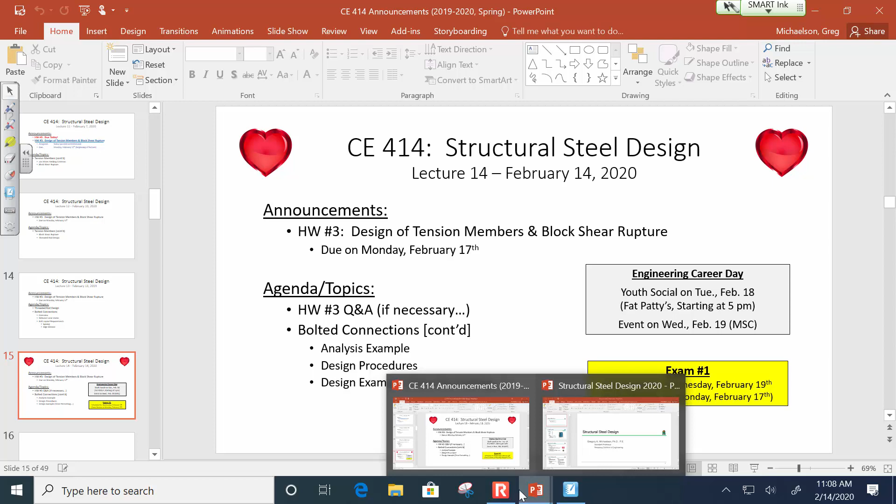Okay, so we're going to talk about bolted connections, keep trucking along. We're doing pretty good on schedule - might be a tad behind, but I trimmed some fat out of the later part of the course, so we've got a little wiggle room.

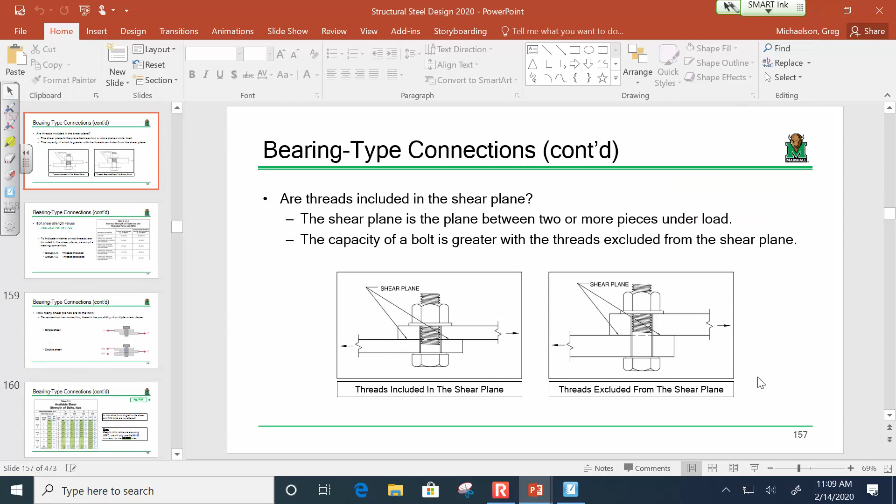We started talking about bolted connections last time. There are two types of connections we'll assess in this course: bolted connections and welded connections. I'd argue bolted connections are the second easiest topic we cover, with welded connections being the easiest.

Now let me qualify that - there's a lot of information and behavior you need to understand, but the math is really simple. Basically, you're going to have a connection with 100 kips on it. Each bolt can hold up 10 kips. How many bolts do you need? 100 divided by 10, right?

That's it, I'm being serious. It really is about that simple. There are some spacing limits and whatnot that you need, and we'll talk a lot about that stuff today. But basically, that's it.

Now, in order to design or analyze a bolted connection, if you're looking at a bearing type connection, there are 2 limit states: the failure of the bolt and the failure of the plate. Let's recap the failure of the bolt, the bolt shear capacity, the load required to shear the bolt in half.

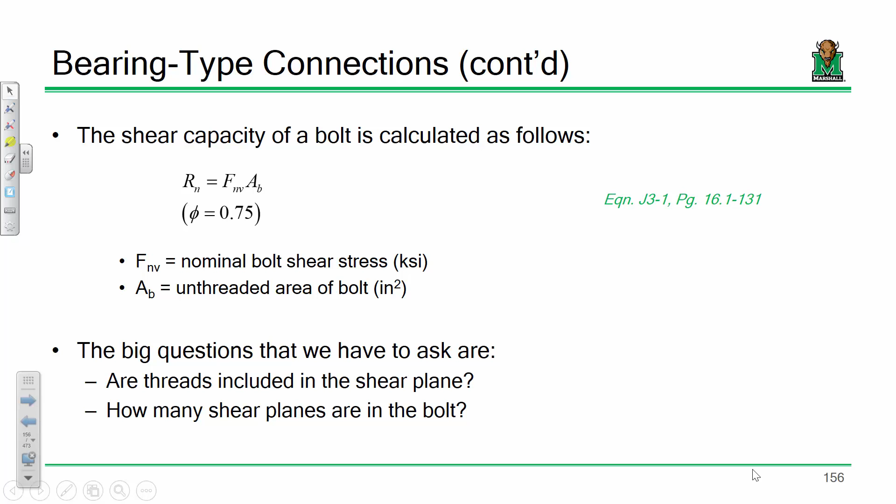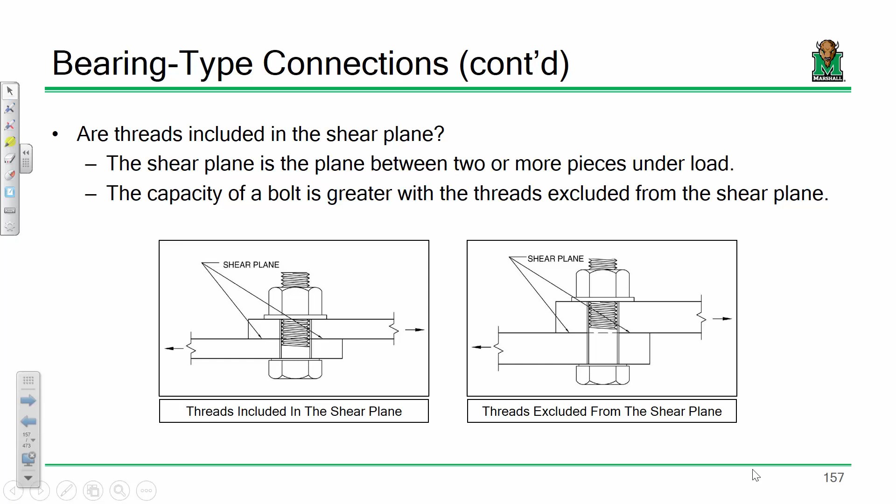So the capacity is the nominal shear capacity, Fnv, times the area of the bolt, pi d squared over 4. When you're looking at Fnv, your nominal shear capacity is a function of whether or not threads are included in the shear plane. If threads are included, the bolt's going to be weaker, okay?

So when you look up Fnv values in table J3.2, it says group A bolts where threads are not excluded from the shear planes, and group A bolts where they are excluded. In this course, we'll refer to that as group A-N, threads being included... I mean, group A-N, threads being included, group A-X threads being excluded. Remember, group A isn't a real bolt type — it's just us taking different bolts with the same behavior and calling them group A. There are A325 bolts, and so on.

Now, the other thing you have to ask is the bolt area. The area of the bolt is pi d squared over 4, but that assumes a single shear plane — a bolt tying 2 plates together. But if you have something like a splice where a bolt goes through 3 plates, there are 2 shear planes, so you multiply the area by 2. The bolt isn't magically twice as strong, but you have to shear through twice as much area to separate the bolt from itself.

Now, everything I'm talking about is pretty much moot because you don't have to compute the capacity of a single bolt at all. All you have to do is look at the table — it does all the math for you. We can walk through this together. Let's do one super quick, just so you see where these numbers are coming from. Watch this.

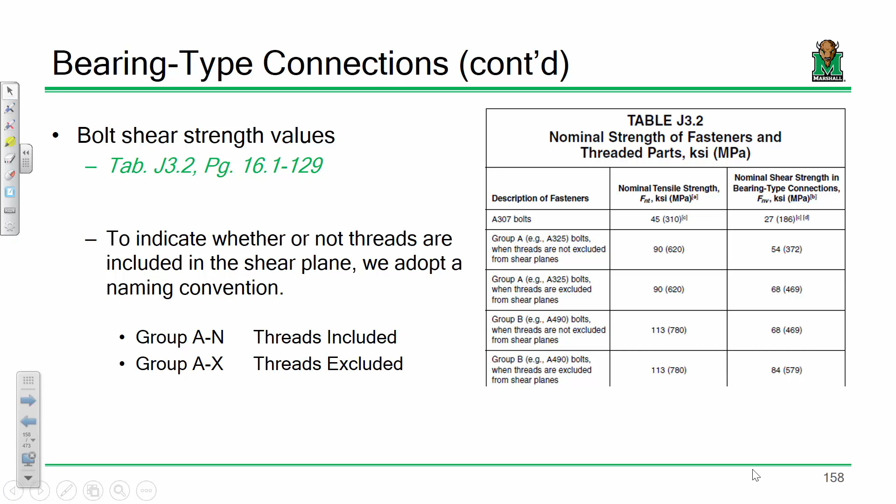So, 17.9, something like that. That's 17.9 kips — I'll say kip per bolt.

Whereas if you go to this table in the spec, what do we have? Let's follow this through: 3/4 inch diameter bolt, group A, threads included, single shear — right on the money. This table just does all that for you. So you don't need to do this calculation, but I wanted you to see where these values come from. It's really not that complicated.

So if I have a connection that uses these types of bolts, and there are 8 bolts, what's the capacity in bolt shear? That capacity times 8. Pretty simple, right?

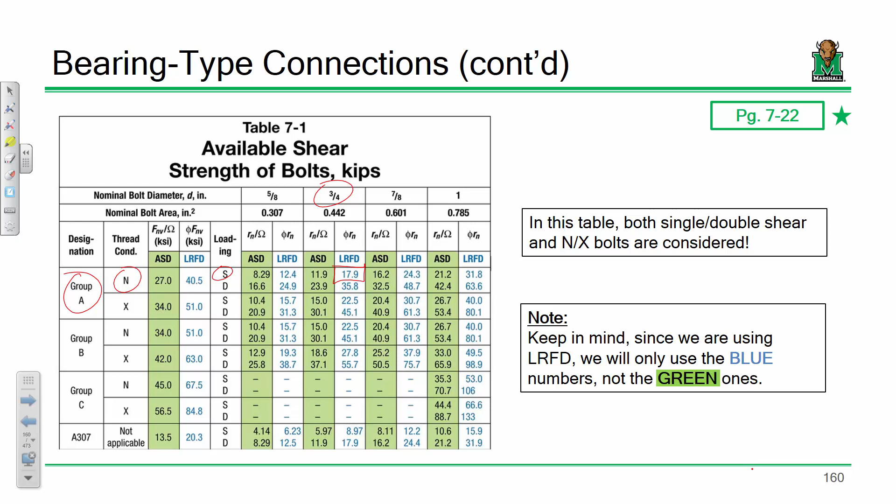All right, let's talk about bolt bearing. So what I've got is a plate, I've got a bolt hole, and I'm yanking on it. Drawing this in an exaggerated fashion, my bolt is actually in contact with the plate right here. So it's one of those things where you're applying the load and asking, what's going to give? Either the bolt's going to snap, or the plate's going to fail.

So let's talk about failure of the plate. We call this a bearing failure, because the bolt is literally bearing on the plate. Hence why we call this a bearing type connection.

Now, there's two ways that the plate can fail. The first is what's called tear out, which is kind of similar to a fracture or a block shear type failure. You're literally shearing that out, and it actually looks like you're ripping a chunk out of the plate.

Whereas ovalization is sort of like you're stretching the hole out. This is where the bolt comes into contact with the plate and sort of mashes it up like Play-Doh, which is the steel yielding in a localized fashion right there at that connection.

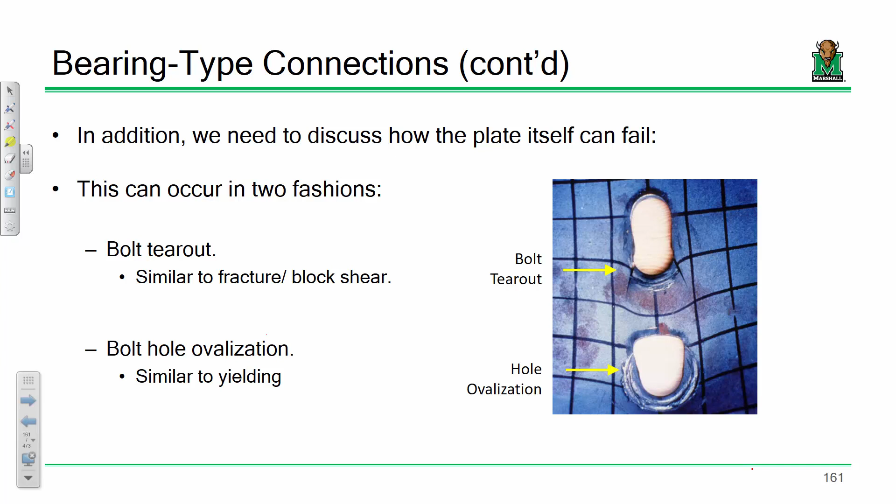Now, the way that you compute the capacity is using this equation. Before I start explaining this, let's recall a couple things. When you have an equation that's a pile of junk less than or equal to a pile of junk, what does that mean? Minimum, taking the minimum of the two. Exactly right.

So what this equation is doing: this is the tear out component and this is the ovalization component. Basically, here's the load required to tear that plate out, and here's the load required to ovalize the bolt hole. The capacity of that plate right there is just the minimum of those two.

And if you're wondering, Dr. Mike, how do you know which is tear out and which is ovalization, you're going to see very quickly. Now, I got a box that says for this computation we're considering deformation at the service load. Dr. Mike, what are you talking about? Well, maybe that involves us turning to section J3.10 on page 16.1-135, and let's actually see what I'm talking about.

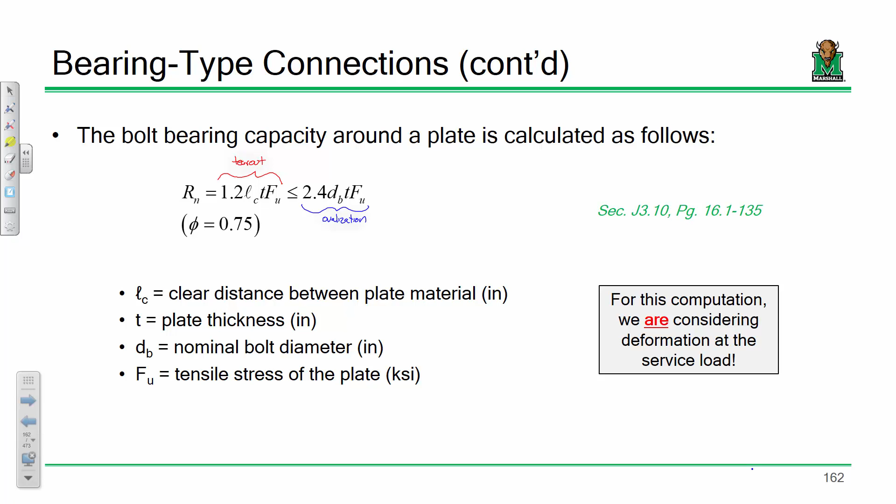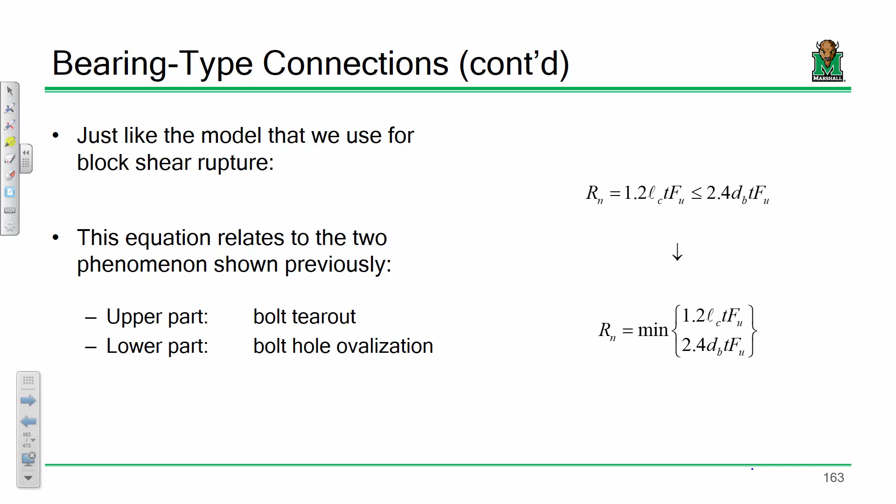L sub C is defined as the clear distance between plate material. Now, the spec gives you a bit of a longer word salad definition, and I'm going to explain that. Just like before, we can take that and split it up into the minimum of these quantities. I'm going to take this equation and make it a little easier here in a second, but basically the upper part relates to bolt tear out, the lower part relates to bolt hole ovalization or bolt bearing, and here's why.

Now let's talk about LC - LC is the clear distance between the edge of the hole and the edge of the plate, or the edge of the adjacent hole. So I'm going to look at this plate right here, taking this and yanking on it. Remember before when we used the letter S? S was the distance between bolts along the direction of the load, right? So if I was talking about this distance, what would I use - like if I had another bolt over here, I'd call that the gauge distance, I call that G. All right, so that's the longitudinal bolt spacing. This is the edge distance - I'm going to call that L sub E.

So S is the center to center bolt spacing here. LE is the distance from the edge, or from the center here to the edge.

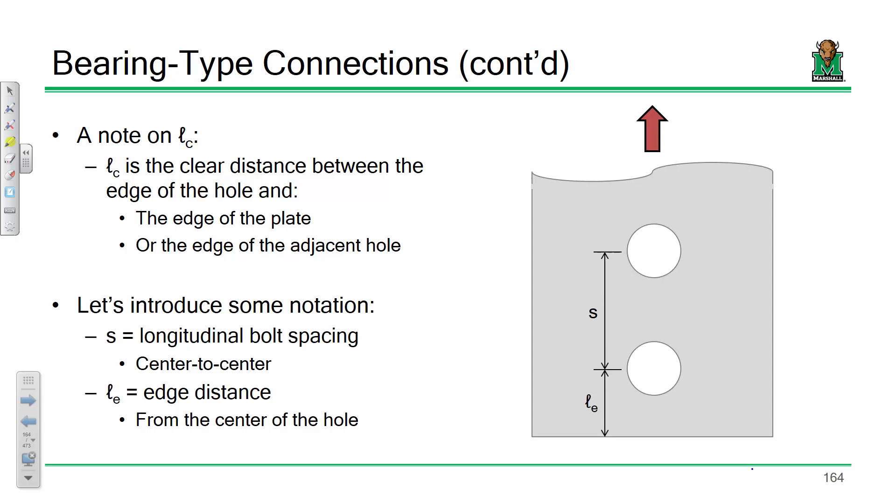Okay, that's LE. The LC values are basically the clear distance from plate to plate, from edge of plate to edge of plate. So we actually have two LC values that we need to consider: an LC for the bolts on the inside of the connection, and an LC for bolts on the edge of the connection. That's why I have an LCE and an LCI.

And how would I compute that? Well, this one right here, I would take the edge distance and subtract half a hole diameter, right? For this one, subtract half and half, so subtract a hole diameter. Does that make sense? So the math is pretty easy, okay?

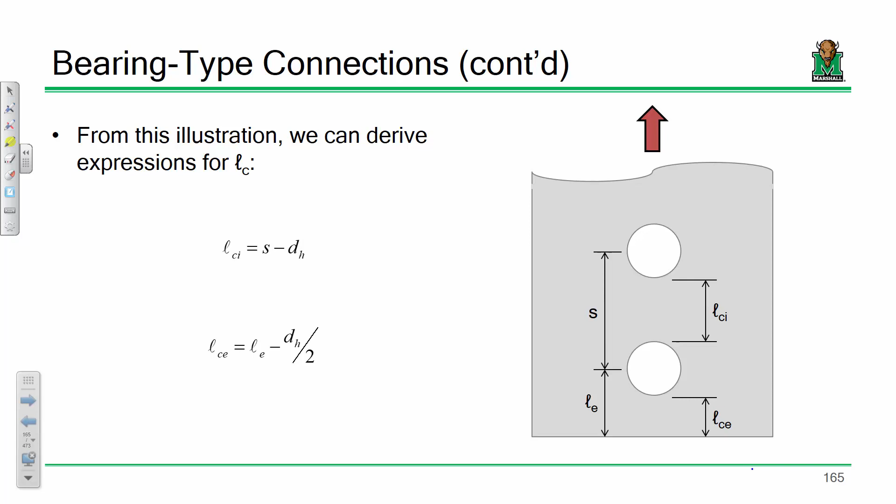Sound good? Now, what's going on with this check? Well, if you look at the 1.2 LC Fu, what we're doing with that, remember I said that's tear out? It's kind of like a mini block shear check. So if I was yanking at this, I basically assume that this is a block shear failure. And if it's a block shear failure, what would be my area in shear? Well, it would be the length times the thickness, right?

But what do you do with shear? What's that magic number that always pops up with shear? 0.6. Remember I told you there'd always be a 0.6 associated with shear. Well, I take this length times this thickness times 0.6 times 2, because there's one here and there's one there. What's 2 times 0.6? 1.2. So that's another way you can tell this is the tear out expression, because it's a mini block shear check, basically. That's why we have the 1.2, because it's sort of a 0.6 in disguise.

Sound good? So this one you can derive, this one you can't. This is sort of empirical. This is going down to the lab, ripping a bunch of plates and figuring out a simple expression that works. Remember in steel design we have the difference between mechanistic equations that we can derive and empirical expressions that we just go down to the lab and break some stuff and find an equation that fits.

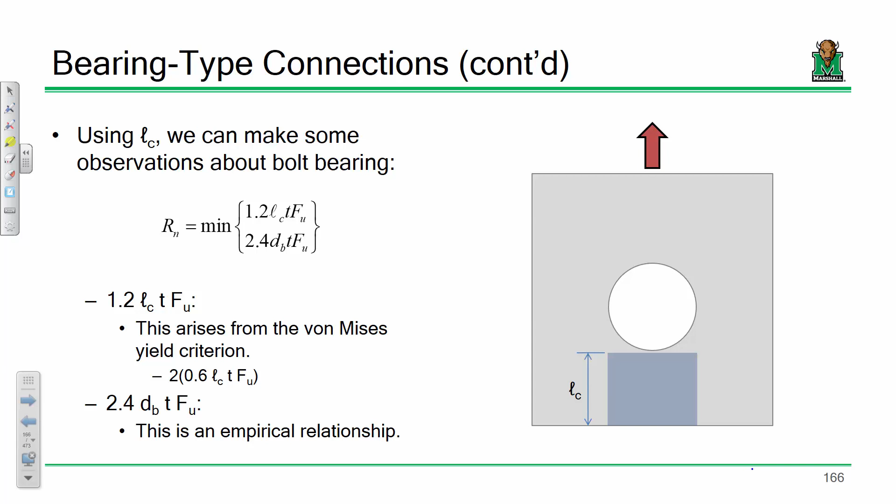So that's what that expression is. Does that make sense? All right, so what I can do is I can take this, retool this expression and come up with something a little bit easier, and that's the one we're going to use. But before we move on, y'all don't like me very much.

In tension members, to calculate the hole diameter, we take the diameter of the bolt, and what did we add? 1/8 of an inch. We're not talking about tension members right now. We're talking about the actual connection, the physical dimension of that hole. We're actually talking about the physical hole itself. Why did we add 1/8 of an inch?

We added a 1/16 for the erection tolerance. We actually drill the hole larger. So the hole itself is physically 1/16 of an inch larger. But we added that additional 1/16 to account for the fact that we didn't think that little bit of lip of material around the hole could transfer load to the member. But we're not looking at the member, we're looking at the actual hole. So here, when we do hole diameters, we add 1/16 of an inch, not 1/8 of an inch. Okay? I apologize, but it sort of is what it is.

Somebody's going to mess that up. And you're like, Dr. Mike, that's understandable, that's easy to confuse. I'm like, I know. So are you still taking points off? Yeah.

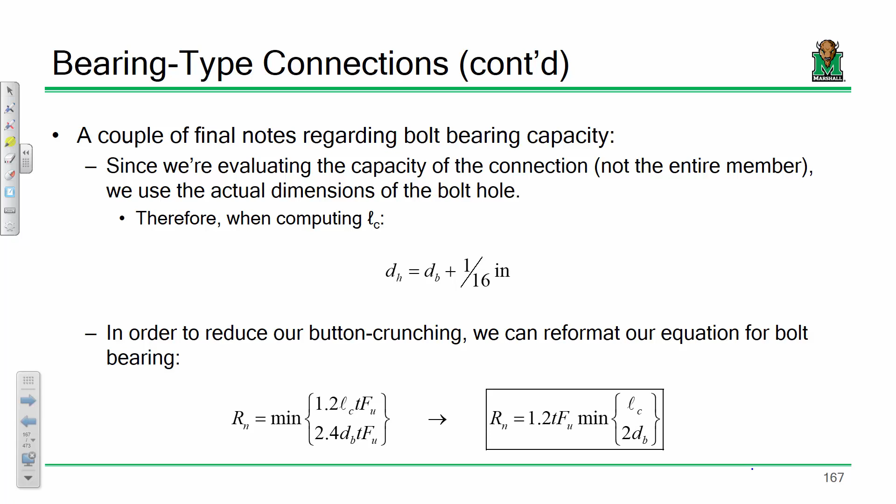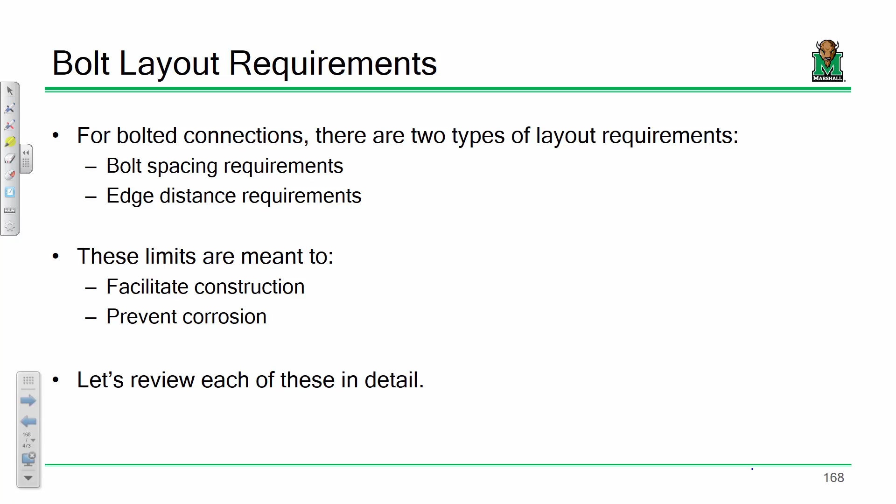So I skipped away from this slide for a reason. We have bolt spacing requirements and bolt edge distance requirements for two reasons. If the bolts get too close together, it becomes difficult to actually construct the component. But if they get too far apart, you can get water in between them. So why do we have bolt spacing and edge distance requirements? To facilitate construction and to prevent corrosion. And when you start looking at the limits that we use and why we pick what we do, that'll make a lot of sense.

So let's start going through the specs. Now we're really going to start digging into Chapter J. Let's go back to the very beginning, to J3. I know this says 16.1-135, but let's turn to 16.1-126. I want you to get your teeth sunk into what it's like to go through some of these specifications, to become familiar with this. So I'm on 16.1-126, and we're looking at section J3, which covers bolts and threaded parts.

By the time we're done with this, we'll probably have looked at just about every section here. Section J3.1 is talking about just the bolts themselves. What is Group A, Group B, and Group C? It's talking about bolt pre-tensioning, which will become clear later on when we look at slip critical connections. But from there, we can really move on.

If you turn the page to J3.2, we're in size and uses of holes. Now there's a lot of text describing this, but if you turn the page to J3.3, that's really what we're after from a hole size standpoint.

I want to look at J3.3 just for the heck of it. Table J3.3, nominal hole dimensions. Look how if you have a half-inch bolt, the standard hole is 9/16, 5/8, 11/16, 3/4, 13/16. There's a pattern, right? The hole diameter is 1/16 of an inch larger than the bolt diameter. Remember I told you how we actually drill the hole physically larger for standard size holes? There you go. What about oversized holes? What about slotted holes and things like that? There's all your appropriate dimensions. And then there's other text in the size and use of holes for when you would use oversized holes, short slotted holes, or long slotted holes, and so on.

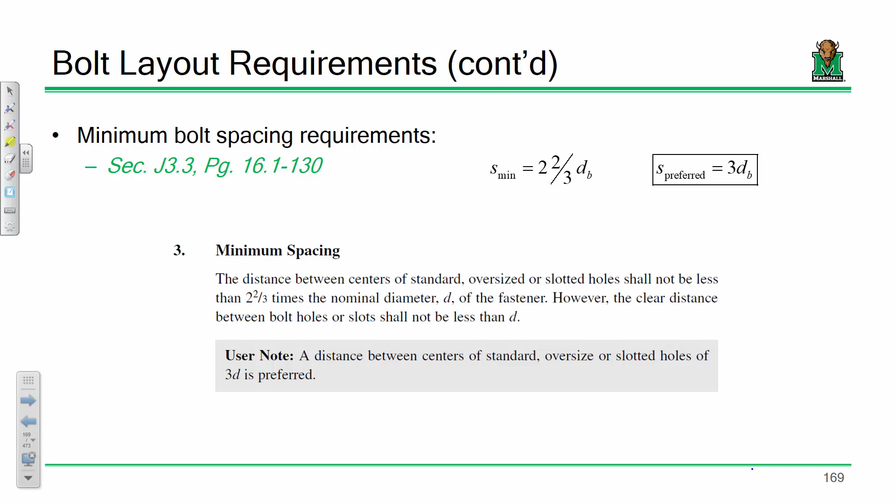So look at this, here's a plate, and I've got to drill a hole on the edge of that plate. How close do I get to the edge where I need to back that off a bit? Where's the closest that I can drill that hole to the edge of the plate and be comfortable that the plate isn't going to get torn up or crack through?

These minimum edge distances really come from the fabricator. That's the fabricator saying, okay, that's about how close I will put that drill bit towards the edge of the plate before I stop feeling comfortable that the hole is going to come out the way I want it. Does that make sense?

Yes sir, is that not dependent on the type of steel you're using? That's a great question, and I would give you a different answer. I'd say it's not really so much dependent on the type of steel, more than it's dependent on the type of drilling method that you're using.

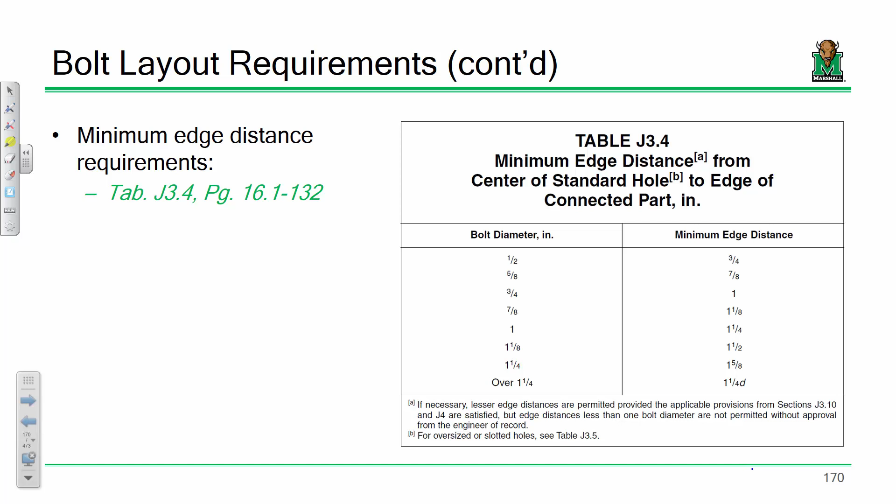Everybody else, did that make sense? Any other questions? All right, for the maximum spacing, now check this out. Remember, minimum distances are for fabricator preference and construction. Maximum spacing and edge distance requirements are for corrosion. So if you read section J3.5, look at the verbiage.

Now, if you digest that and think about it for a bit, what the spec is saying is that if you have a member and you painted it, you can get by with spacing your bolts out a little further. But remember what the limit is for, it's for preventing corrosion. Well, if your member is painted, it's okay if the bolts are spaced out a little further, because what happens if water gets in between them?

The water's not in contact with the steel, it's hitting the paint. So if you provide a system like painting to prevent corrosion, then you can get by with a little bit more water, or a little bit more space in your bolts.

Now let me be clear. Most designers in load carrying capacity connection situations are not going to try and bump up against maximum spacing limits. Usually we try and keep our connections small and compact. But if that's the situation, your maximum limit depends on your coating. What we do in this class is assume the worst case scenario, so we go with spacing requirements assuming the members are unpainted. But if you have a painted member, just recognize that.

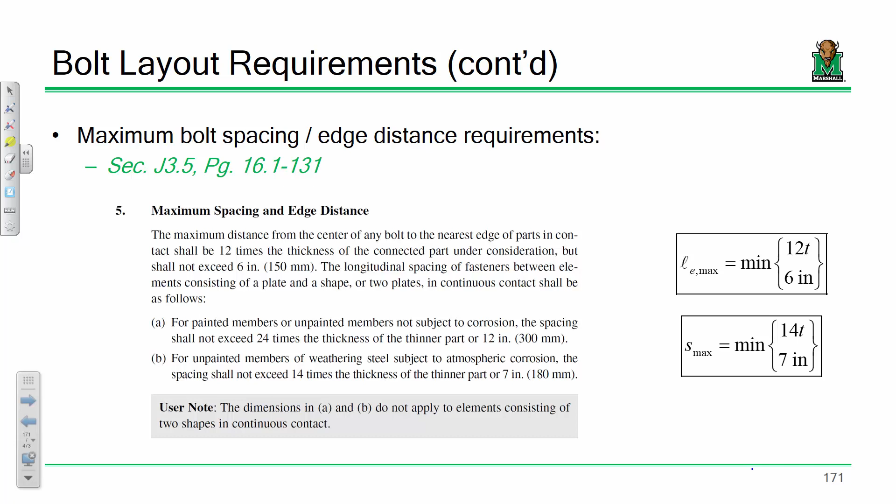Now your edge distance requirement doesn't matter whether it's painted or not. If you read this first sentence, the maximum distance from the center of any bolt to the nearest edge shall be 12 times the thickness or 6 inches. It doesn't care whether or not it's painted or unpainted. It doesn't matter. Sound good?

All right, so I put here on slide 172 a nice little summary of all the formulas. So here we have a bearing type connection. We have two limit states to consider: bolt shear and bolt bearing.

Bolt shear, I can look it up. Bolt bearing, the capacity of a single bolt is 1.2 times the thickness times FU times the minimum of either LC or 2 times the bolt diameter. And whichever one of those is the minimum will tell you whether the bolt is going to tear out or the bolt hole is going to ovalize.

How do I compute the LC values? Well, there's a different LC value for the edge bolt than there is for the interior bolt. And all of that is based on a hole diameter, where the bolt diameter you add a 1/16 of an inch, not an 1/8 of an inch, because you're looking at the actual physical dimensions of the hole, and not how much will transfer load to the connection as a whole.

That was pretty bad. It's okay.

Lastly, bolt spacing requirements. The minimum bolt spacing requirement is 2 2/3 times the bolt diameter, and the preferred spacing is 3 times the bolt diameter. The maximum bolt spacing is 14 times the thickness, or 7 inches, assuming unpainted steel. A very common bolt pattern is to put your bolts 3 inches on center, since most fabricators are already tooled to do 3-inch on center connections, because that spacing meets the requirements for 3/4 inch, 7/8 inch, and 1 inch diameter bolts, the 3 most common bolt diameters we use in structural engineering.

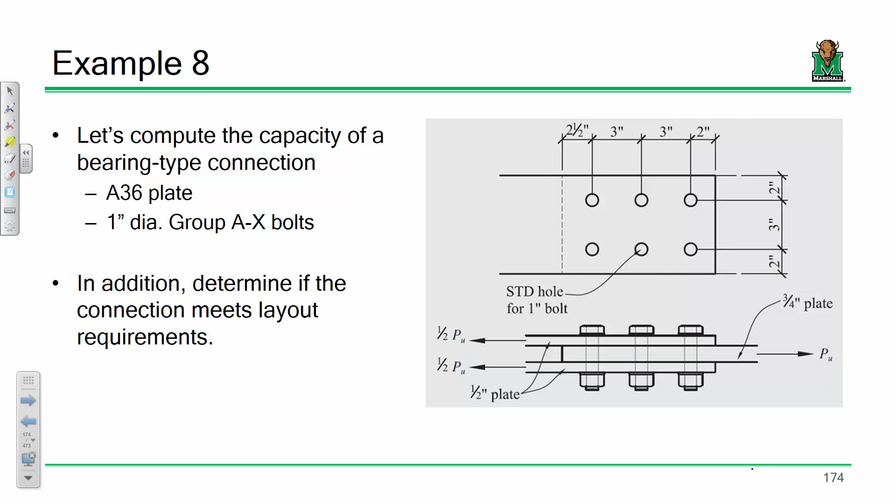Sound good? All right, this is what we're going to do next time, because I threw a lot of stuff at you. We're going to do an assessment of this connection, looking at this center plate. We can look at the splice plates later, but we're going to look at the center plate and see what's the capacity of that connection. Now, if you understand how to compute the capacity, you can then do design, and we're going to design a connection. You can see there's nothing there yet. We're going to design that connection later on.

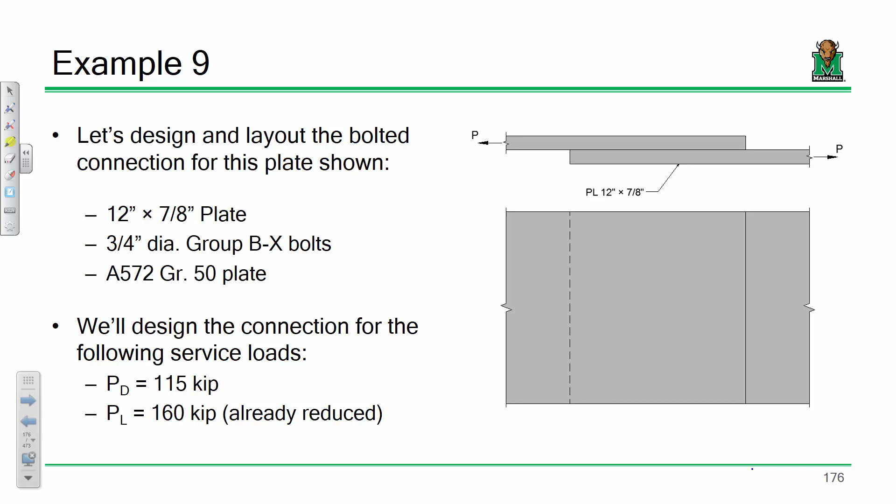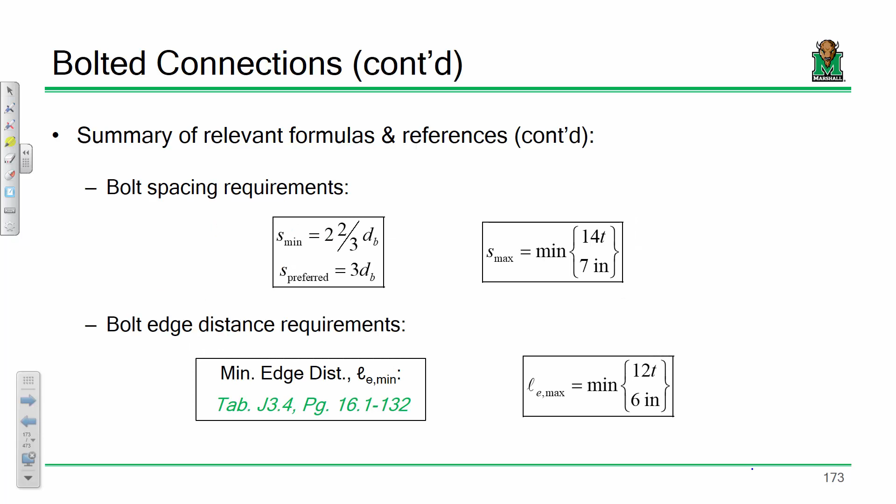I'm going to actually call it there, but one thing I'll do is leave it up here in case you all want to denote that. Slide 172 and 173 are sort of my summary for you on bolted connections. With this class, there's a lot of different tables and formulas and equations, and I always like to put these little breather slides, if you will, like, look, here's everything.